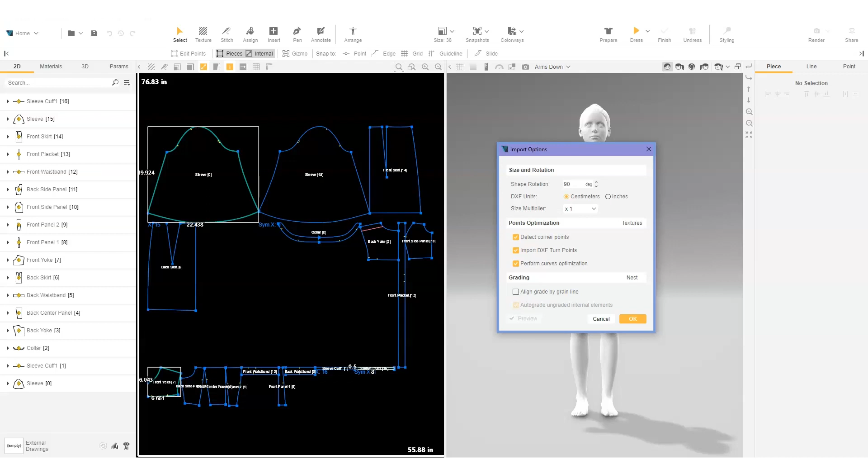The Import Options settings determine how points are displayed. Because every software creating a DXF file has its own peculiarities, we may need to experiment to find the best setting. Match your import option settings to the options shown. Once we're happy with the settings, we click OK and the file is imported. Let's expand the 2D window. We can do so by placing our mouse in the 2D window, then clicking Tab on our keyboard.

Let's go to the 2D tab on the Resources tabs. We can see each pattern piece listed in the 2D tab. Each piece is displayed with its name followed by ID. The ID is a system-generated number displayed in square brackets. We cannot edit the ID, but we can edit the name by double-clicking the existing name and typing in whatever we want for the new name.

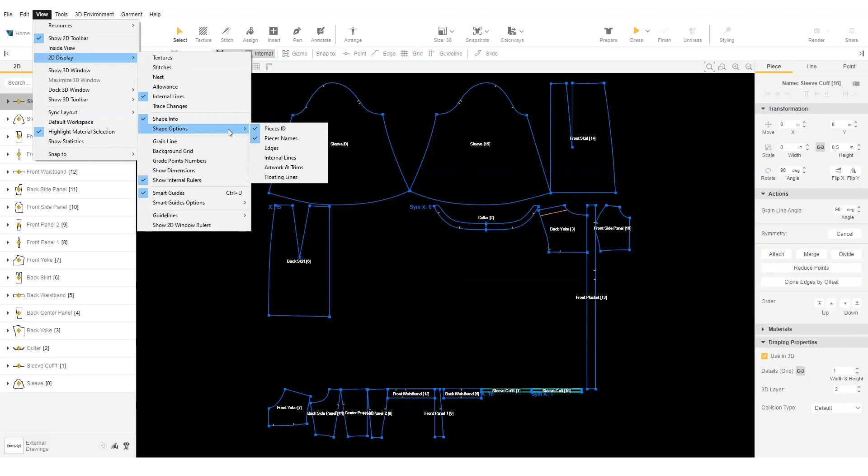Note that we can toggle the display of piece information in the 2D window using the eye icon on the 2D window toolbar. If we would like to see the piece name in the 2D window, we will need to navigate to our main menu, View, 2D Display, Shape Options, and ensure Piece Names is selected. We can select a piece by clicking on it, after which it appears with a blue highlight.

When we import a DXF file, we may see a warning icon displaying on the pattern piece listed in the 2D tab. This is typically to remind us we need to arrange the pattern piece before we can simulate the garment. This topic is covered in detail in a separate video.

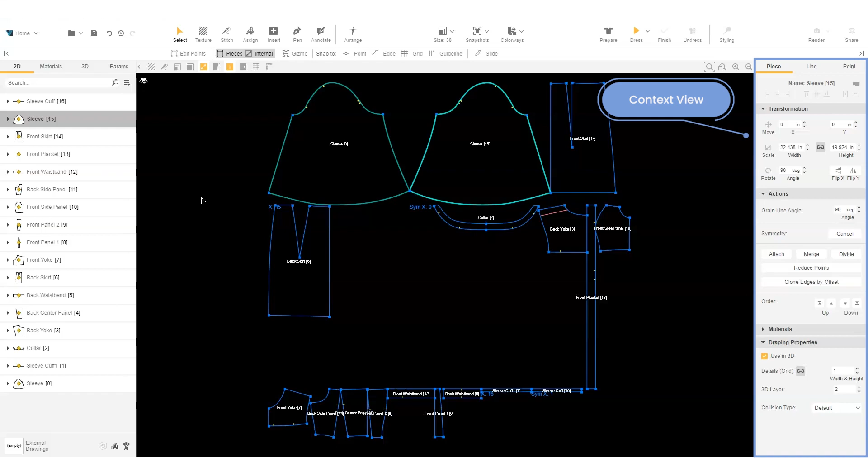Now let's move away from the 2D tab and focus on the context view. The contents of the context view depend on the elements we select and the tool we select. For example, when we select a pattern piece, the context view displays options relevant to a piece. Similarly, when we select a line, the context view displays options relevant to a line. However, notice how the line options change depending on whether we select an edge or an internal line.

And when we select a point, the available options in the context view change. Lastly, if you have selected a pattern in the 2D or 3D window, you can toggle to line or point in the context view to select all the lines or points on the pattern.

Now that we are familiar with reviewing the pattern piece details, let's arrange our patterns in the 2D window. This step helps us familiarize ourselves with the patterns in the file, confirm all necessary patterns are included, and identify if we need to add symmetry to the pattern pieces. We split the 2D window into two sections. We put the front pattern pieces on the left and the back pattern pieces on the right.

We arrange the sleeve next to the front body with the sleeve caps facing in towards the front armhole. The collar is placed above the back pieces aligned to the center back. When there are multiple pieces that make up the front and back, we organize the pattern top to bottom and left to right, aligning the edges where they should stitch, but with a slight gap between the edges. It is not required to use this layout, but we recommend using this layout as a beginner.

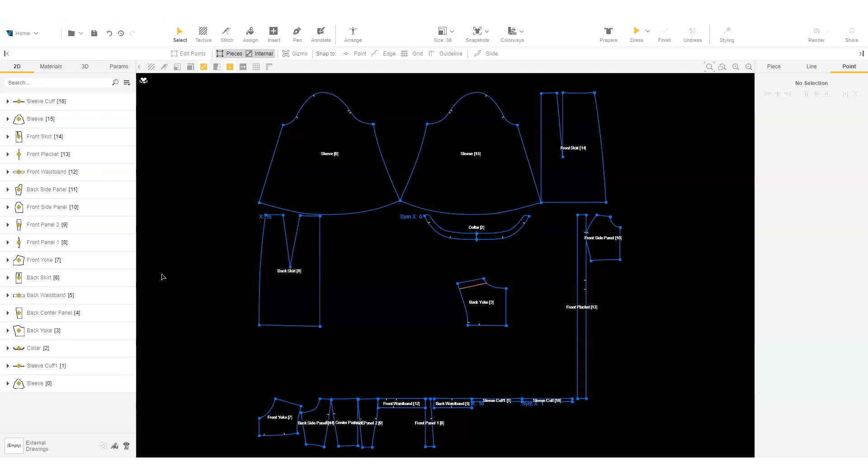Let's start by identifying our pattern pieces. With Shape Info turned on, we can see the name of the patterns. We can reference the specification sheet to help identify the pattern pieces as well. Starting with the front, we identify the front yoke.

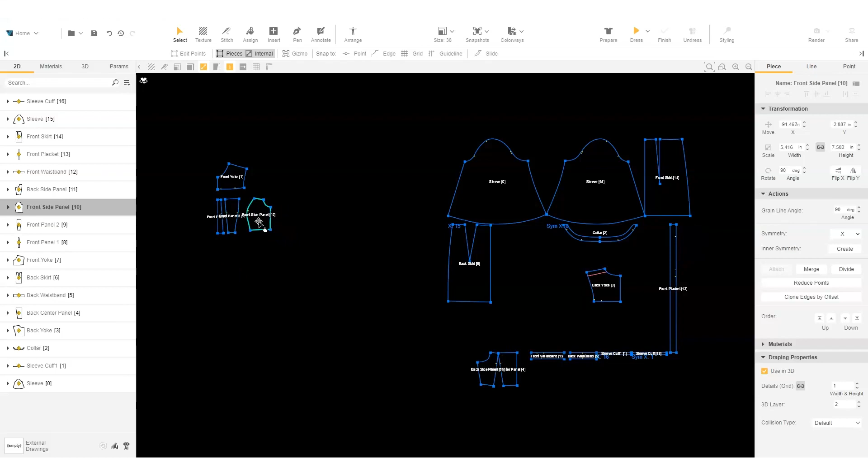Next, we position the 3 front panel pieces. Then we have the front waist and skirt. Lastly, we identify the front placket and align it with the other front pattern pieces.

Next, we will show you how to create shape symmetry. We only have pattern pieces for the wearer's left front. In some cases, a DXF may not include a symmetrical copy of the patterns. Shape symmetry allows us to link pieces or edges so that actions done to one are automatically done to the other. Applying symmetry to all possible pattern pieces can greatly increase speed and efficiency when building 3D garments.

Piece symmetry has 2 directions that the piece actions can mirror: x-axis, meaning horizontal, left and right, y-axis, meaning vertical, up and down. Let's create a symmetrical copy of the front yoke. We do this by selecting the piece in the 2D window, then going to the Action section in the context view and clicking the symmetry we want. Now we have a symmetrical copy of our pattern piece.

If we make a change to the original piece, the change is automatically replicated on the symmetrical piece. To cancel piece symmetry, we select the piece in the 2D window and then go to the Action section in the context view, this time clicking Cancel. Note that although we cancel the symmetry, both pieces remain. Let's undo this action.

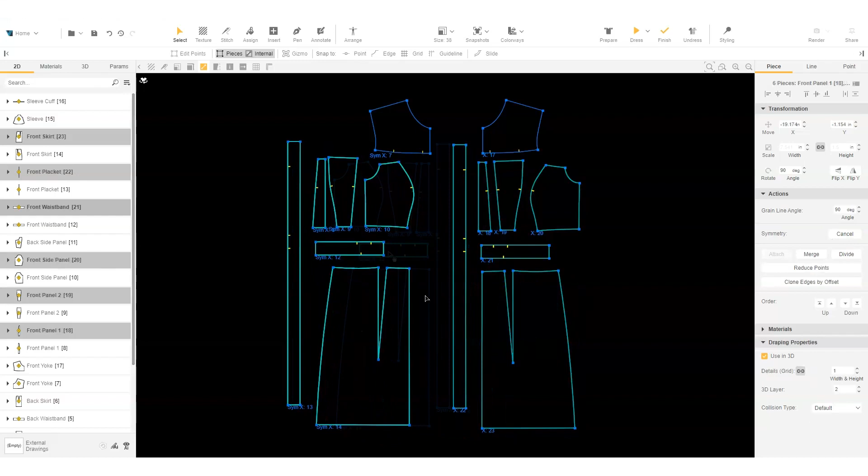Now let's identify our back patterns. We arrange our back patterns to the side of our front patterns. We only have a symmetrical half of some of our back patterns. Let's create edge symmetry. Edge symmetry extends the symmetry of a piece by using an edge. Let's apply edge symmetry to this edge.

We do this by selecting the edge in the 2D window and then going to the Action section in the context view, and at Edge Symmetry, click Create. The original piece is extended through the chosen edge. Applied edge symmetry is indicated by a dashed line through a pattern piece. The new piece has symmetry on each side of the symmetry line.

To cancel edge symmetry, we select the piece in the 2D window and then go to the Action section in the context view. To cancel edge symmetry, we have 2 options: keep both or keep half. If we select keep both, the pattern piece remains but with symmetry cancelled. If we select keep half, only the original half of the pattern piece is retained.

Review the back patterns. Identify which symmetry type is needed per piece and apply edge or piece symmetry. Remember to check the specification sheet design reference. We need to add edge symmetry to the back panel, waist, and skirt. We can also create edge symmetry by right-clicking the edge. Apply piece symmetry X to the back side panel.

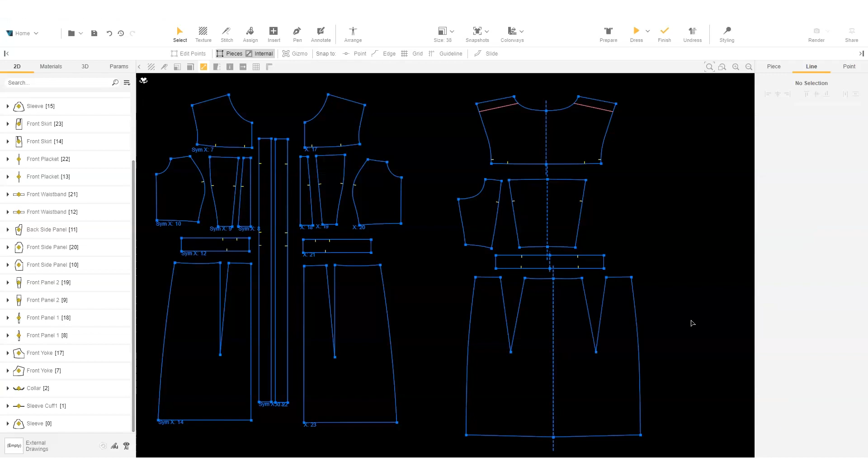When we arrange the pattern pieces in the next step, we need the sleeves to be rotated. We turn on the gizmo under the Select tool on the horizontal contextual menu. When we select the sleeve pattern, the gizmo now displays. Click and drag the black dot to rotate the sleeve. Hold Shift to rotate constraining to 45-degree angles.

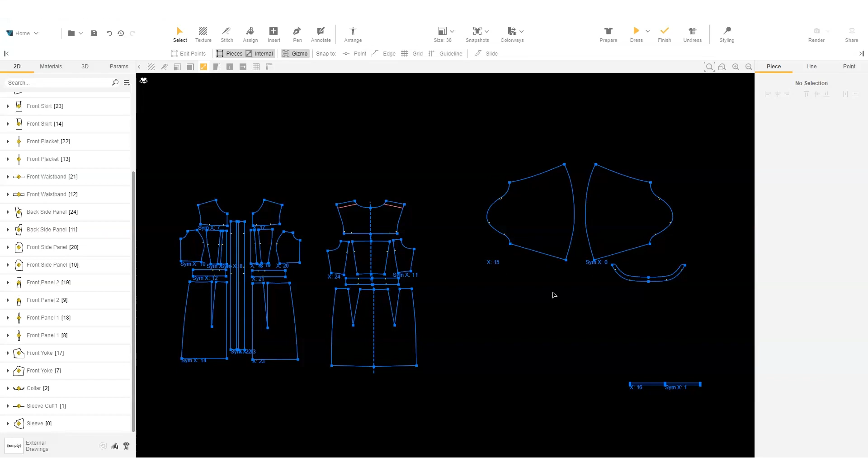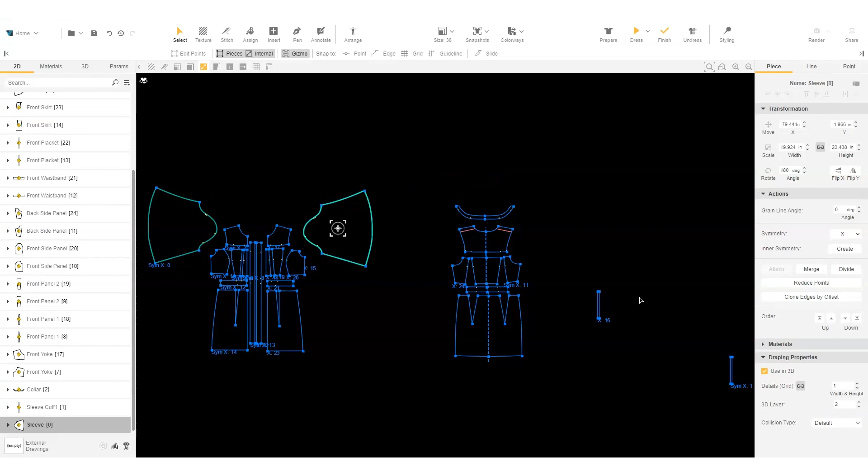Be sure to rotate the sleeve so that the double notch indicating the back of the sleeve along the armhole is facing up. We do the same for the sleeve cuffs. Lastly, we position our collar over the back body and align the sleeve cuffs to the sleeves. Let's save our file.

In this video, we have shown how to import a DXF and identify the patterns. For more information on the topics discussed, check out the video description.